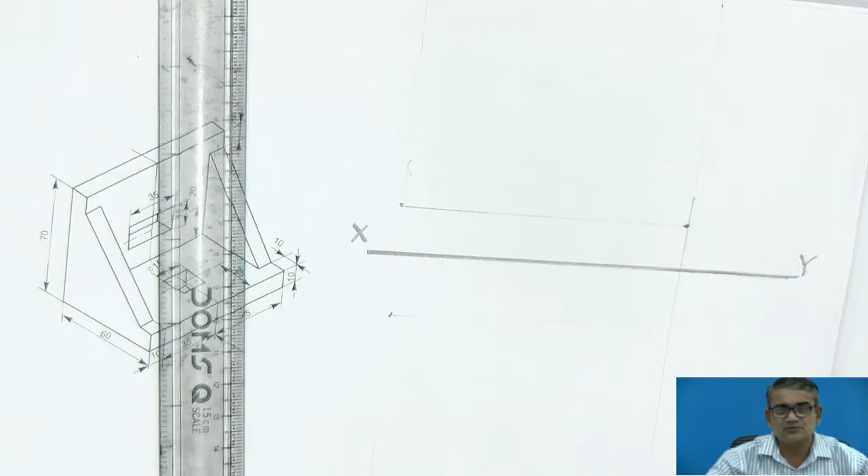This isometric drawing is given. From that isometric drawing, you have to draw the orthographic projection. It is given that in the direction of the arrow, you have to stand for the front view, and you have to draw the front view and the top view. So the basic concept is you have to stand in the direction of the arrow marked X and see that particular object.

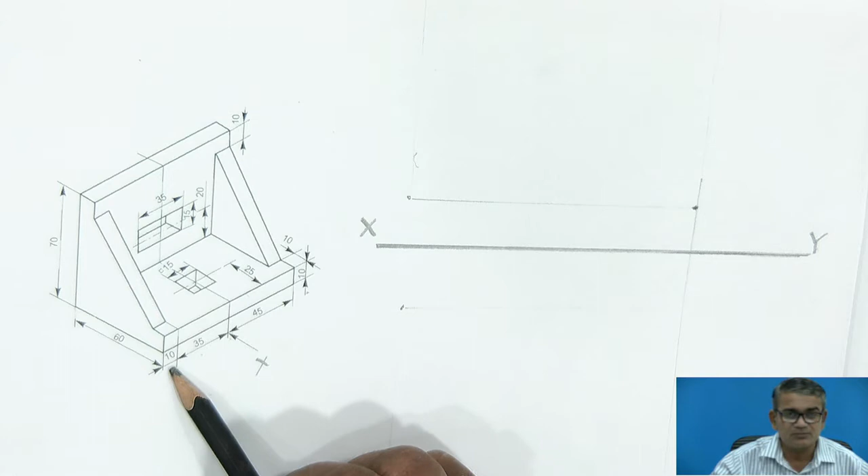Now we have to draw the XY line, but before that you have to calculate the maximum dimensions in the front view. It is known that the right side is 45 and the left side is 35 plus 10, that is 45. 45 plus 45 is 90, and total height is given as 70. So maximum height is 90 by 70.

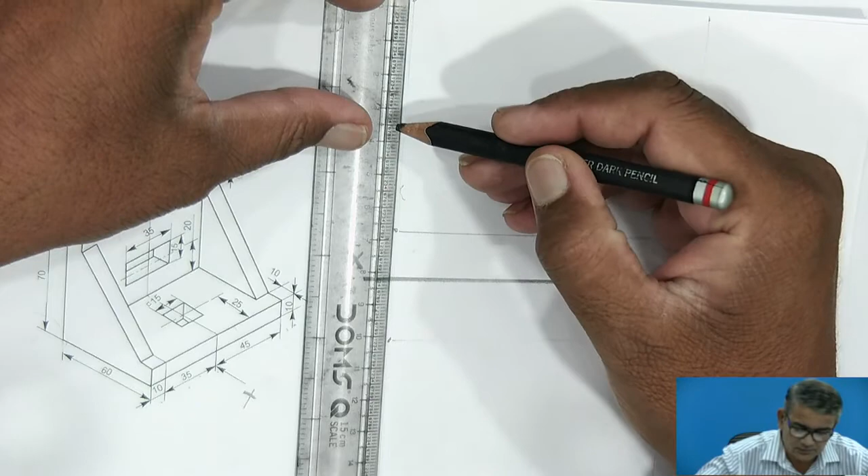So first I am making a small border line of 90, and height near about 70 mm. Make a block of 90 by 70.

In that, you have to start with the first point, that is the first block. This block is parallel to you, so it is seen as it is - a true shape, true image is to be there, and height is 10 mm.

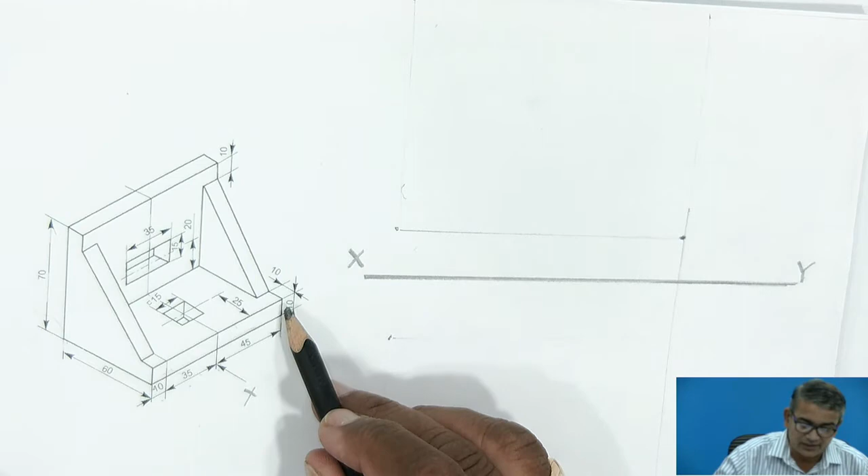Take the dimension of 10 mm here, and here it is also 10 mm. Make a block of 10 by 90.

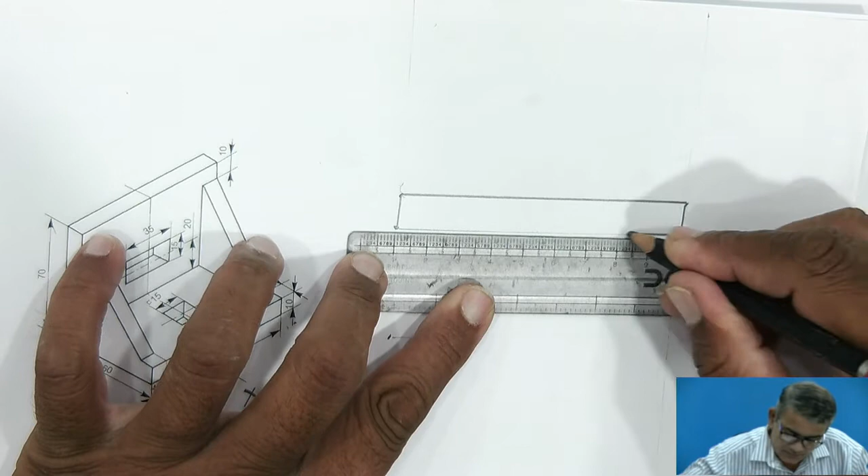So the first surface is parallel, this surface. Now the second one, the behind surface, is again parallel to you. What is its maximum dimension? Maximum 70. So complete this block first.

So first you have to draw the surface parallel to you as it is. Second, the vertical surface parallel to you, you have to draw as it is.

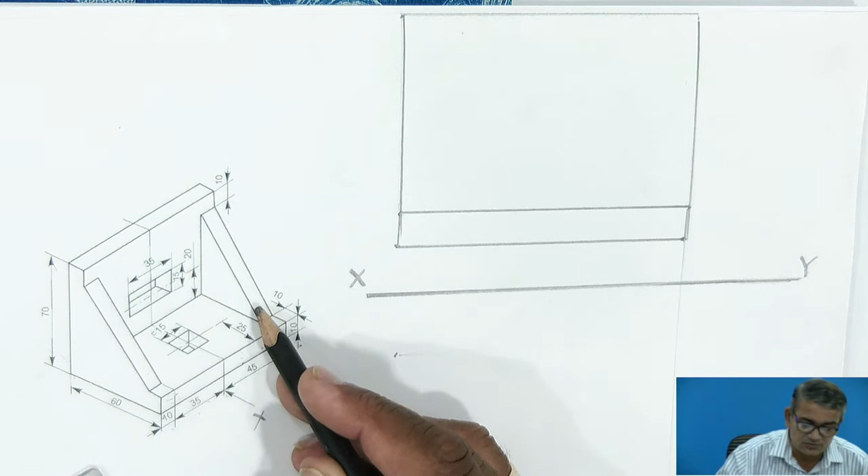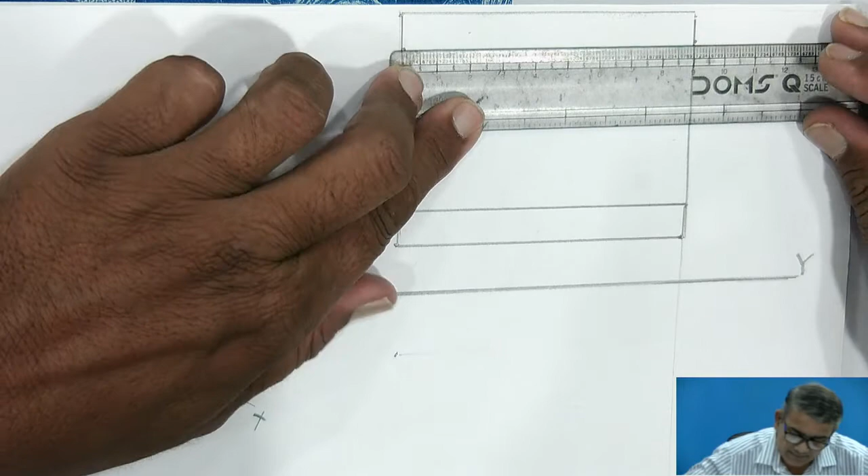Then these two ribs are there. These ribs are supposed to be 10 mm behind, but in the front view it seems to start at the front side. The thickness is given as 10 mm, and it ends 10 mm below. So mark 10 mm from the top end on both sides, here and here. And the width is given as 10 mm on both sides, right and left. Draw it.

For these two inclined ribs, draw the first surface parallel to you, then the second surface vertically parallel, then draw the inclined rib as it is.

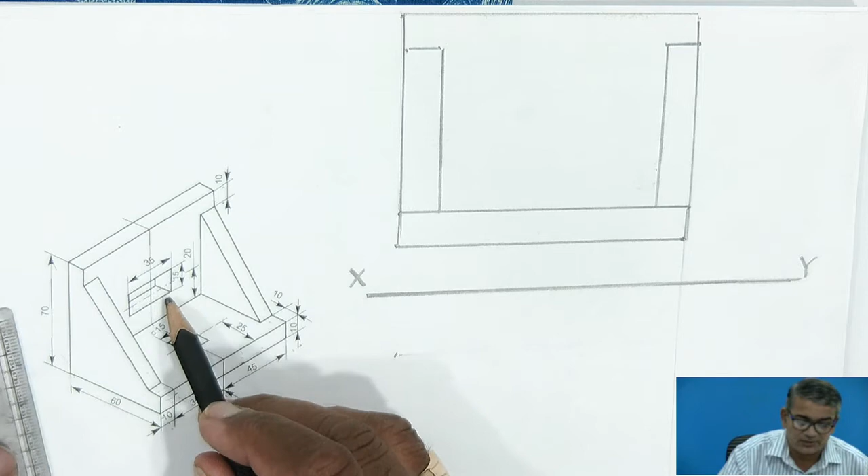Now there is a central hole, a square hole. Where is it? It is at the center, so draw the center line from the first one. It is 45, and the total width is 90. So draw a center line of 45.

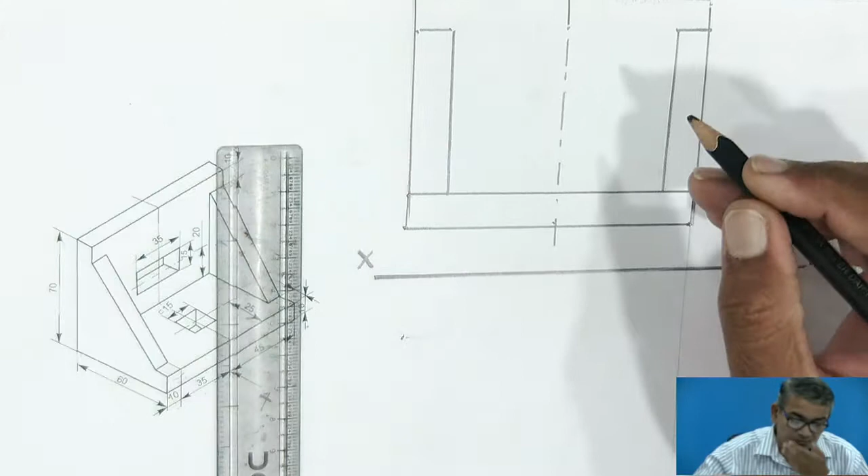Then what is its location? From this surface, its center line is 20 from the base. So draw the center line at 20 mm here.

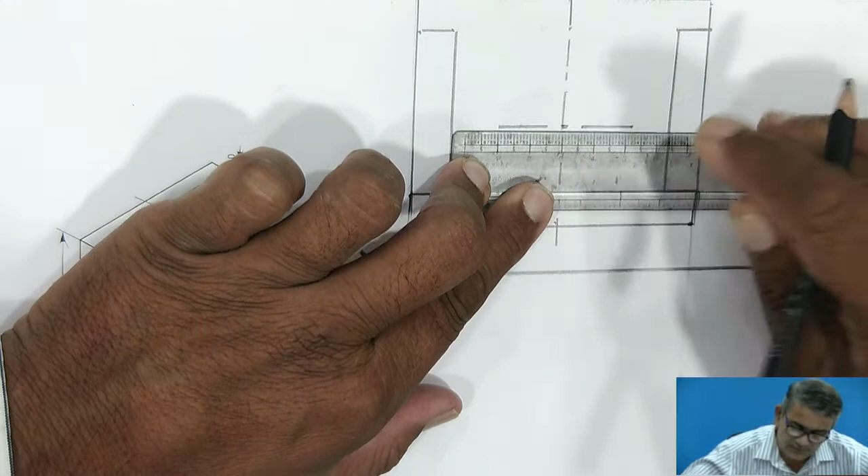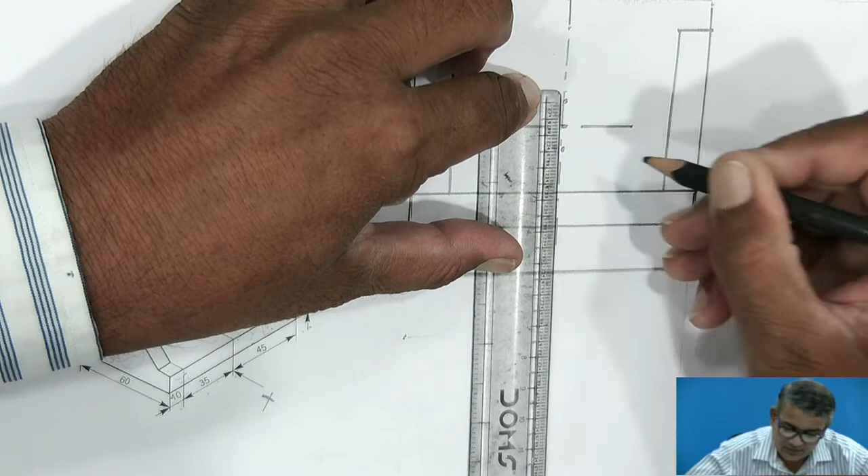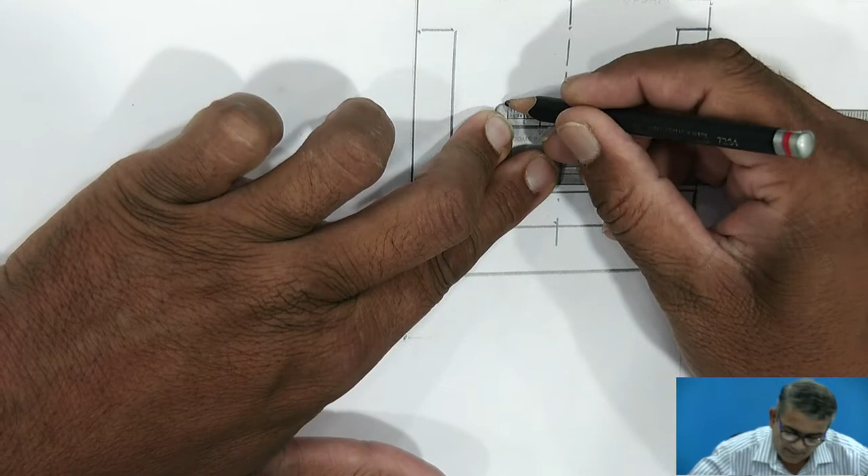What are the dimensions of the square hole? The dimension is 35, and height is 15 mm. 15 means 7.5 above and 7.5 below, so 7.5 here and 7.5 here. And the total width is 35 - right and left, 17.5 and 17.5 each.

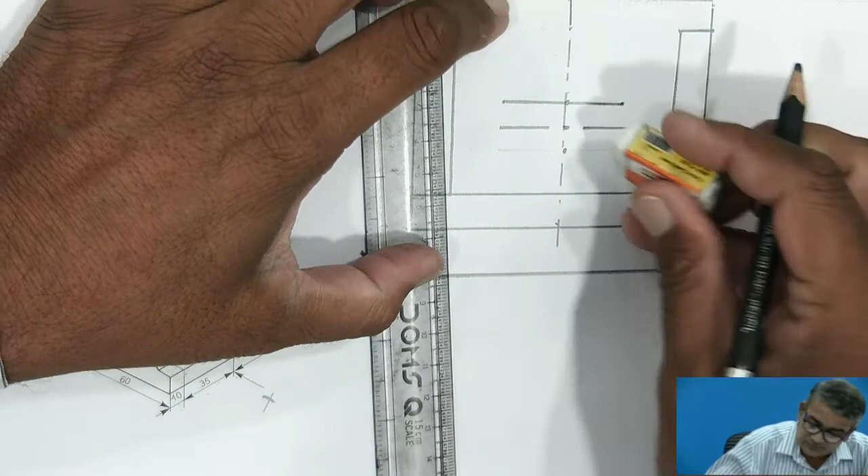This is a center line. It's okay, this surface hole. Now one more hole is there for the base slab, but in the front view it is hidden, so show it as a dotted one.

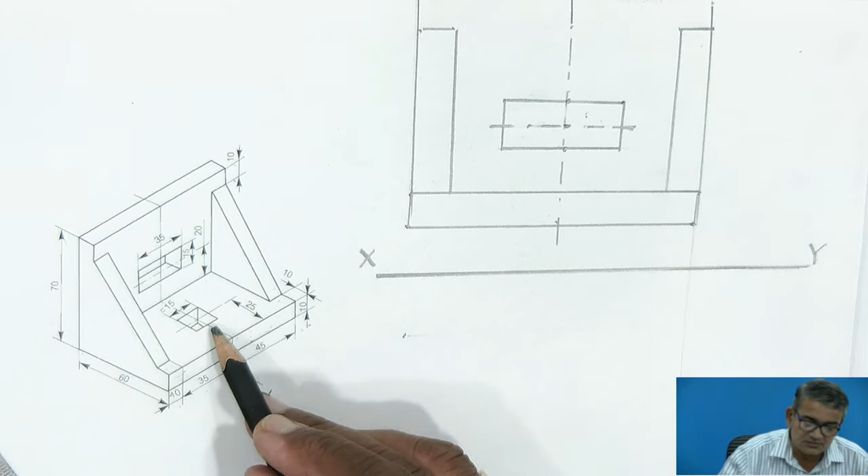What is its width? 17.5, and base to base is 15 mm, so 7.5 and 7.5 both sides, 7.5 and 7.5, and it is from top to the bottom one. So it is a front view.

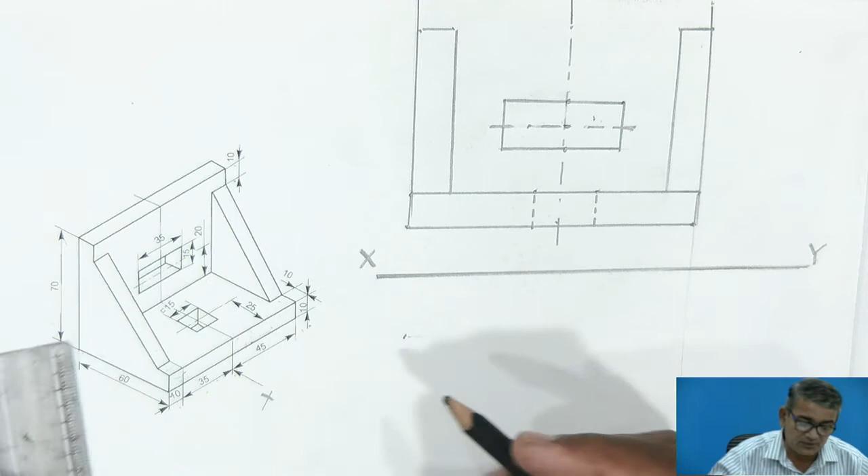Okay, now what about the top view? When you have to see from the top view, this dimension is already given, that is 90. Draw the projectors of 90 as it is. And what is the depth? The depth is given as 60. So from a fixed point, take the dimensions of 60, make a block of 60 mm.

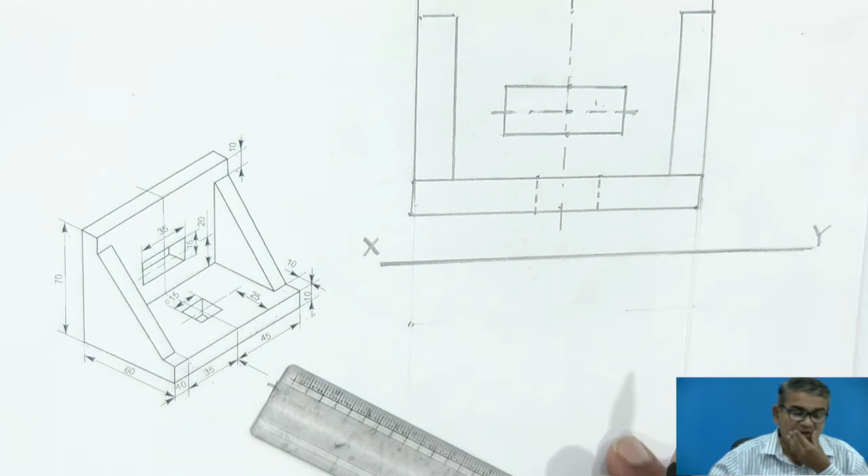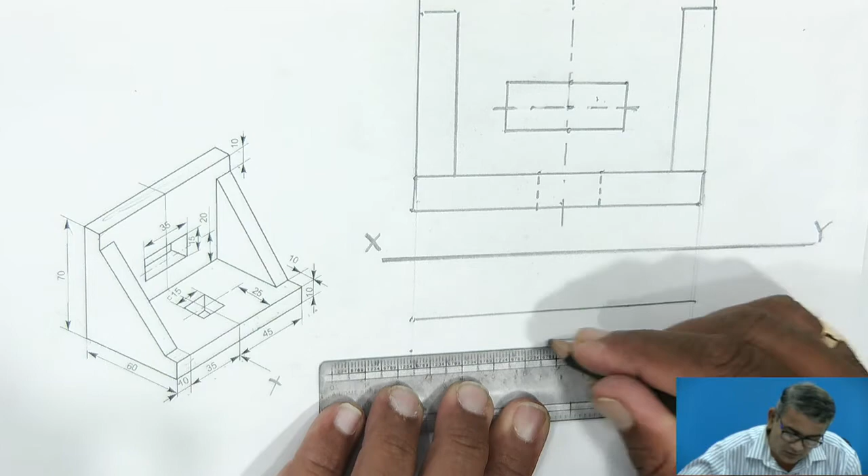Now which surface is parallel? This surface is parallel. How much is it? 10 mm is its value. So from this end you have to draw 10 mm. Here it is 10 mm and here also it is 10 mm. Because it is parallel, you have to draw the true dimensions as it is.

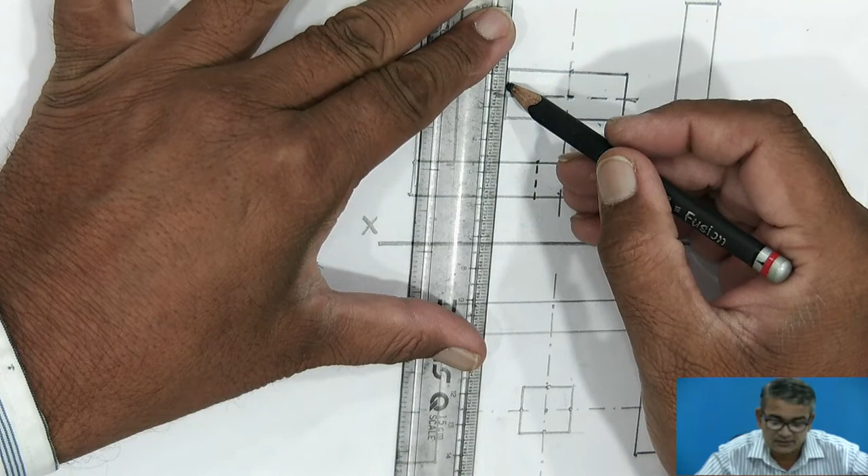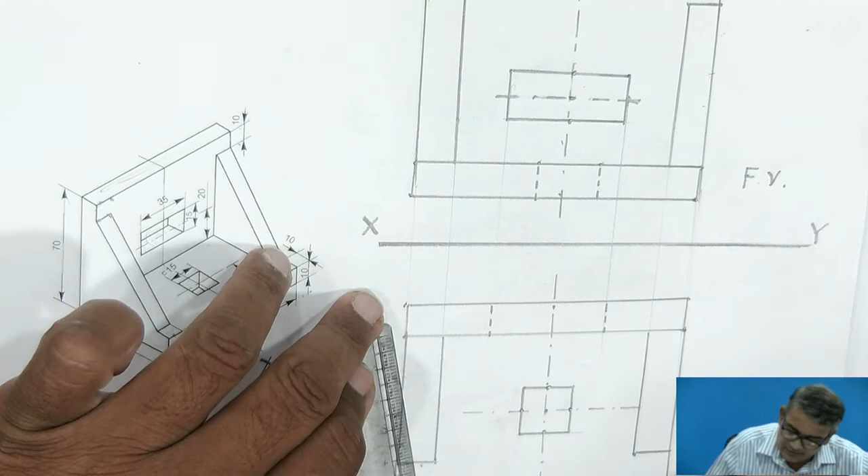So this is the front view, and this is the top view. So its maximum dimensions first.

When you have to draw the orthographic drawing, in that direction first you have to check the maximum dimension. What is its maximum dimension? 90. And height is given as 70. So first make a 90 by 70 block, and draw whatever is inside that.